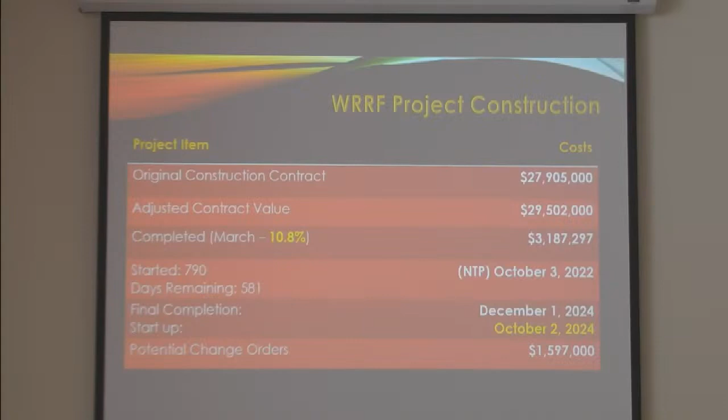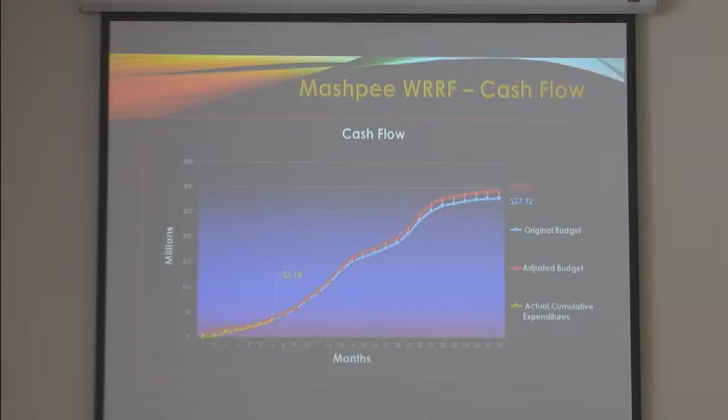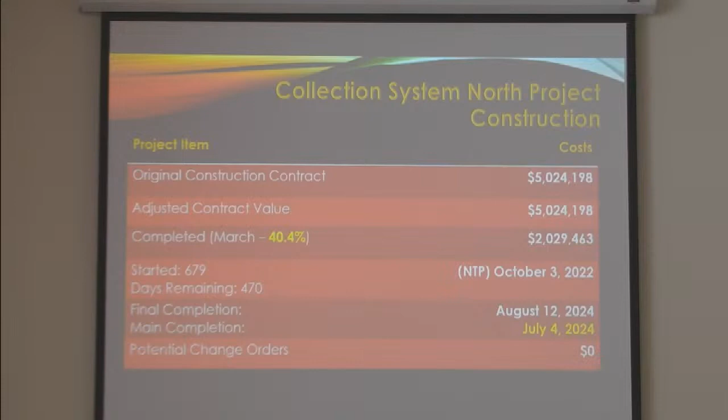Days remaining, which I'll mention along with the completion percentage on the next slide, is 470. Notice to proceed was October 3rd, so final completion date would normally be August 12th. Main completion, meaning main without services, would have been July 4th, and there are no change orders at this time. On this graph, you can see the $2,030,000 paid out so far; I had always said these lines should try to stay relatively close.

This is the northern contract, but the Route 28 work was included under the northern contract, so that's why they're ahead of schedule with regard to actual expenditures. Forgetting about the 2-year period, I expect this one to be done by the end of this year.

That 2 million represents 40% of the work done. Does that mean it's going to be 10 million altogether? No, no, no, no. That percentage this year was a percentage of value, not percentage of time. If it was percentage of time, it would be different, but the values should stay within budget. The big thing, and the good news, is that I do expect this contract to finish up probably around the end of the year, which is saying a lot for the contractor.

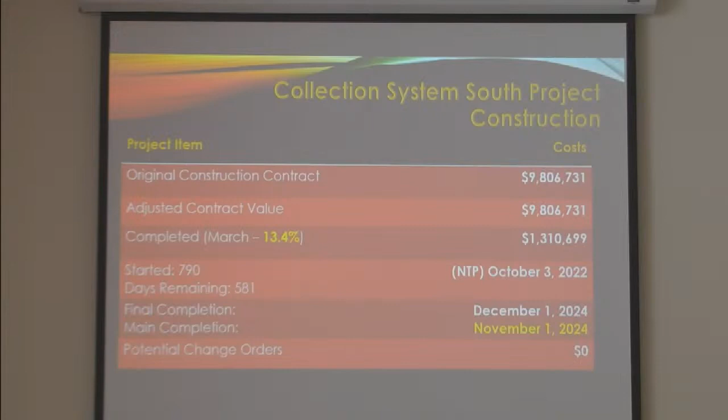So then for the southern area, this is the larger of the two contracts, 9.8 million. There were no change orders, so that's the value. As of March, but it is 13.4% done. These crews would have been further ahead, but they were pulled to go on Route 28. So for the month of April, virtually no work was getting done down south, just a minimal amount, because the effort was focused on Route 28. We paid out 1.3 million on the contract, 581 days remaining. It's expected that the mains will be completed on this one by November of 2024.

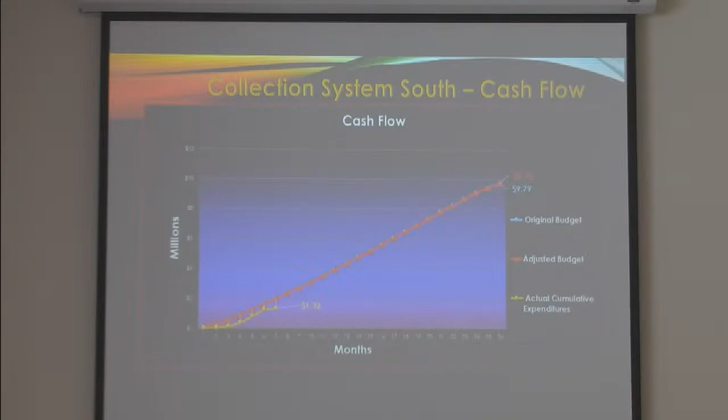And this is just the cash flow. This is a little bit less because, like I said, all the costs for Route 28 were included in Contract 2, not Contract 3. So this is the area up north.

I did want to point out a couple things here. The yellow represents the work that has been done. So here you have all these yellow mains already installed, including Butler up here, and this work was just recently completed on Drew. Now they'll be moving down to High Sachem and doing these areas next. Route 28 is yellow because that one's already done.

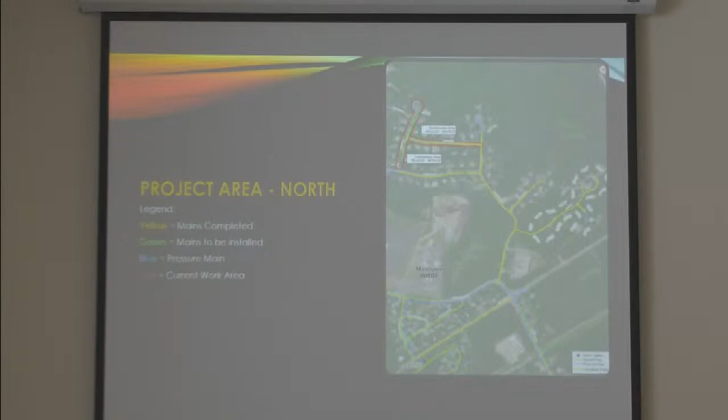This is the southern area. The main was completed all the way up on Mashpee Neck Road. Simon's Narrows main was completed, but services have to be installed on both of these roads, so the services weren't done yet — that takes a separate service crew, and they'll bring them in later. Then we have Shipwreck, which is complete, Ship's Anchor, which is pretty much complete, and Porthole, which they'll be working on next. The other 4 roads up here will be done in sequence right after that. So they're actually moving along pretty well.

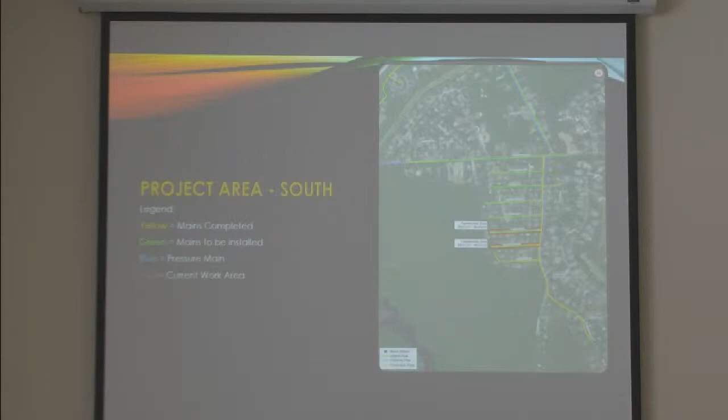So, time for some pictures. These are the... I'm sorry.

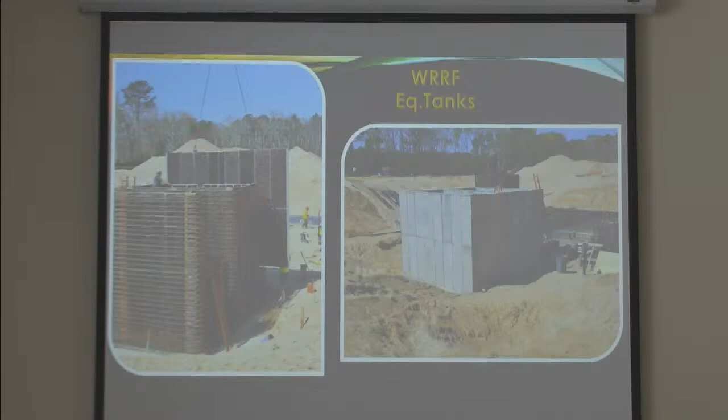While you had those streets up, I thought it'd be a good time for me to ask this question. We've run the main down Simon's Narrow Road. Now, that is projected on all of our other documents as being in Area 2A, which was going to be done in Phase 2. So I'd like to know how much is going to be done down Simon's Narrow way.

What's the actual name of that street? Simon's Narrows. Is that going to go all the way down to the end of Simon's Narrows? In other words, are we actually picking up half of 2A now? No — where this terminus is shown, it's probably 1,300 feet from Mashpee Neck Road, and that is the end. The terminal manhole was installed right there, so for this project that's as far as it goes, about 15 houses down, that's it.

So we have all the rest of 2A to pick up, and Pickerel Cove too, to get that side done. Yes. Thank you.

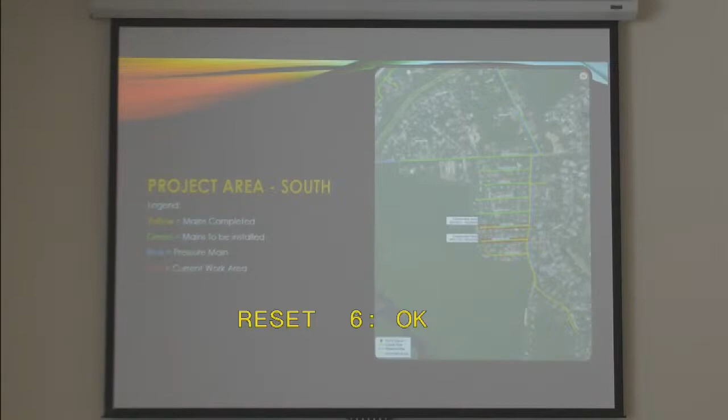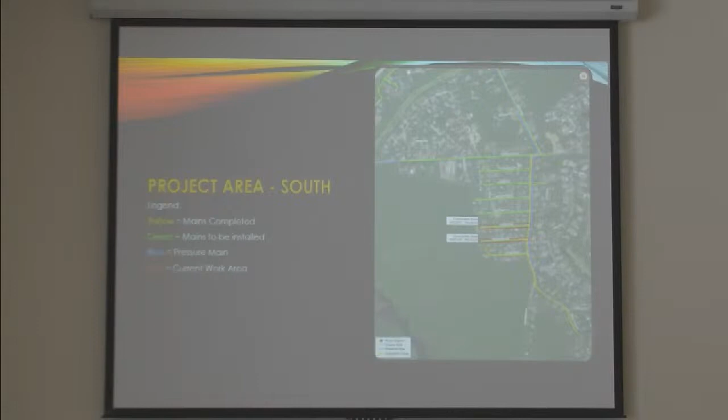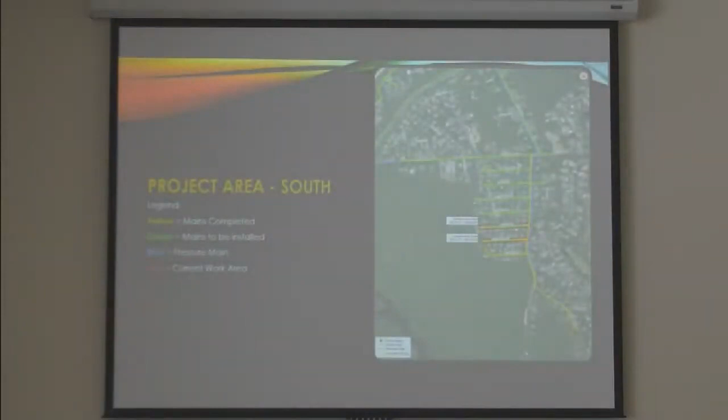Did you actually mean Pickle Cove? No, we meant Pirates Cove. Pirates Cove, yeah. Did I call it Pickles? Yeah. Pirates. Pickerel Cove. Real place, by the way. You know that. Okay, so here we go.

So these are the equalization tanks, and on the left is showing you where we were at the last presentation. The rebar was up and they were putting the forms on the exterior of the rebar. The photo on the right was taken this month, so the concrete has already been poured and that structure is complete as far as the concrete goes.

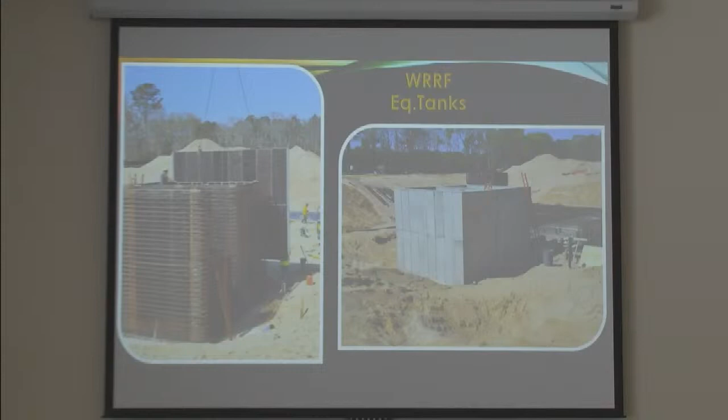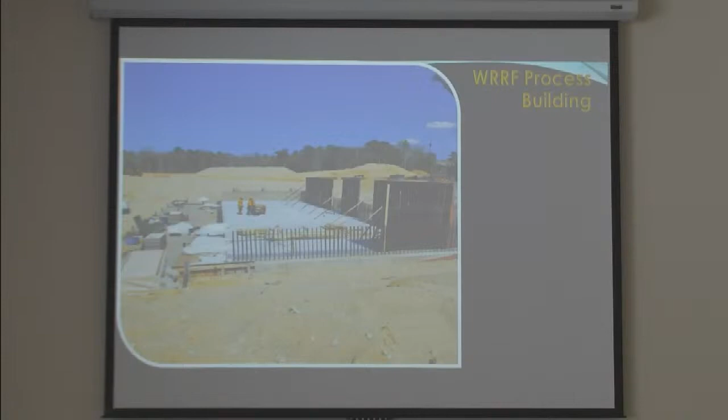And this is where we are now. This right here is that floor area that was already poured that you saw, and then along the back and along the side over here where you see the plastic sheathing draping the walls, those are the walls that were already poured. These are still the forms over here for walls that remain to be poured. Over here you're going to have the rest of the building, which includes the process tanks themselves. Those are the basement walls for that building.

Yes, so the first floor actually is going to be right up there. Once it's at ground level, all that's going to get filled in.

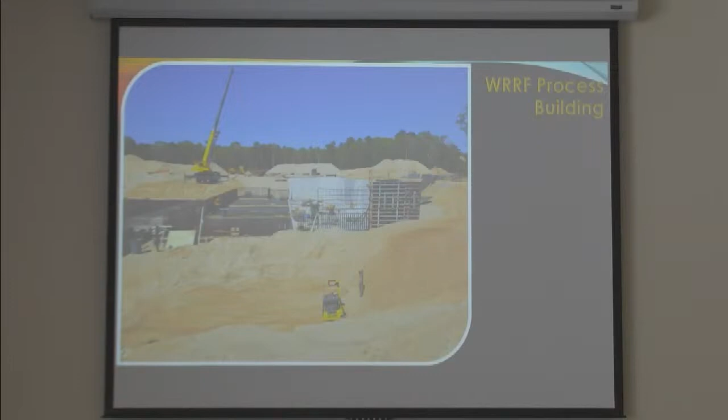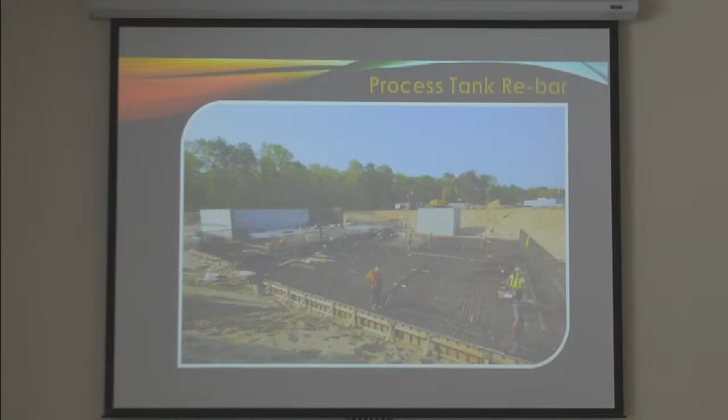So now these are the process tanks, or in Joe's vernacular, that would be the trains. This is a reverse image, so what you're seeing here, that structure right there are the equalization tanks. These over here are the walls that have already been poured on the process building. This is the process building floor. Normally these pictures are taken from up on the hill here, so this is on the other side of the site, which is why it looks a little different. But this is all the rebar and forms going in on the process tankage right there, and the underground piping has already been installed.

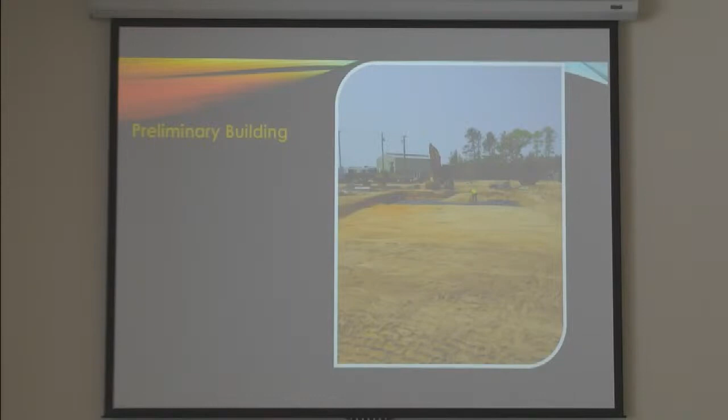The preliminary building is going to be another structure built closer to the transfer station, so this would be to the west of the equalization tanks and the process building. This is where the wastewater is going to enter the building. The degritters and solid separation units are going to be located within this structure. So this is the first place wastewater enters when it comes into the plant. They're already working on that now.

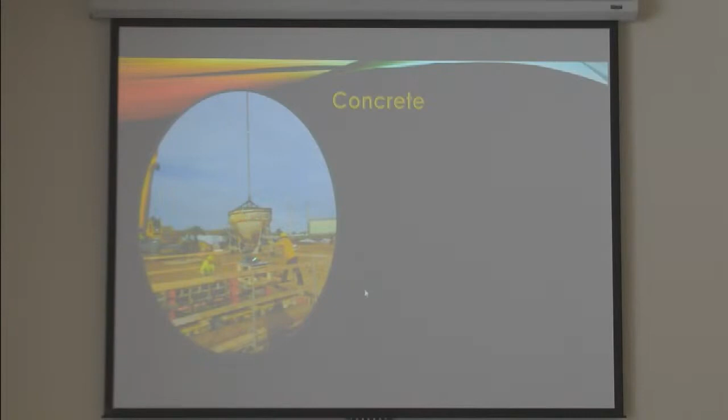This is just to show you a couple of the methods used on site for pouring concrete. On the left-hand side here you can see the yellow, that's a crane, and of course you can't see the rest of the crane up there. This is a chain coming down with a concrete pouring bucket, and they were pouring it down this chute to put it into the walls. This pour here would have been for the equalization tanks. Concrete gets poured in here from a truck, and then this gets lifted and moved down to the construction area to put the concrete in.

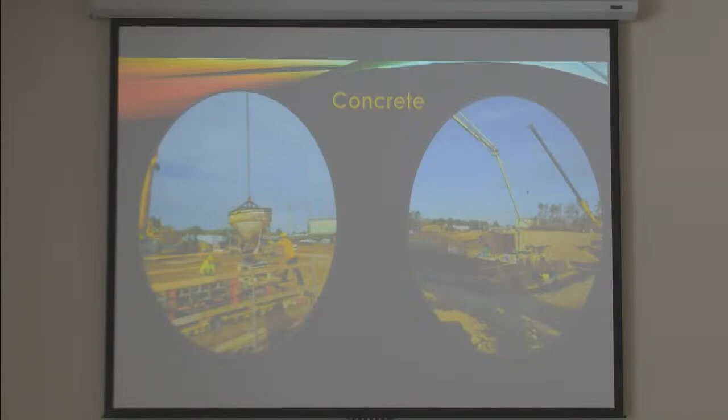The second method used out there is the concrete boom. You can't see the truck, but this is the boom structure that pumps the concrete up to wherever you're going to be pouring it. A lot of times this is what's done with the slabs, and in this case I'm almost positive this was the slabs going in. Right down here is a tube that goes all the way down to the rebar. So there are two methods they use on site to fill everything with concrete.

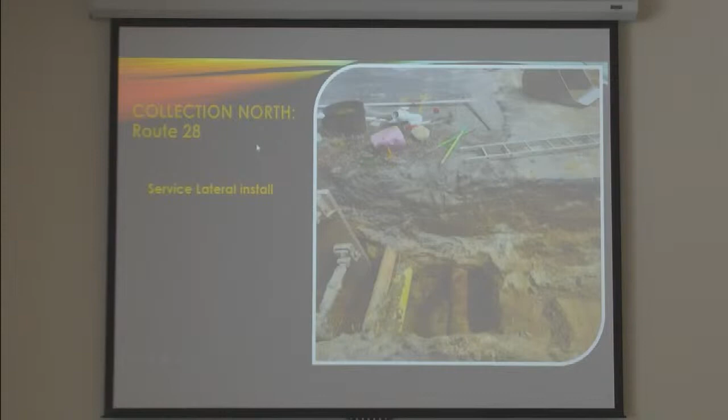So where we are and where we're going: they're continuing excavation for the preliminary building, not the process building - that's the other one that looked like a bunch of sand, heading up to the transfer station. They'll continue underground piping for that building as well as the mixed liquor suspended solids tanks, a fancy term for sludge tanks, that's going in now too. Then they'll pour foundations for the process building walls and the mixed liquor suspended solids tank. I don't think they'll have that for the preliminary building during this period, but we'll see.

They're doing good out there, making good progress. On the north, Drew Lane is already done, and they'll be working on High Sachem. In the southern area, Ship's Anchor Drive is already done, and they'll be working on Porthole, and then the four other roads north of that.